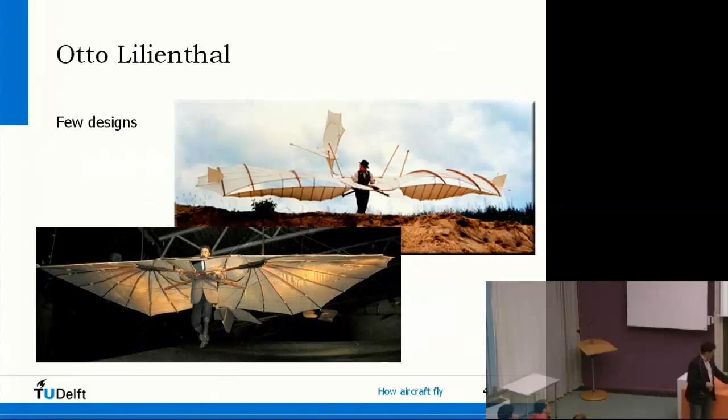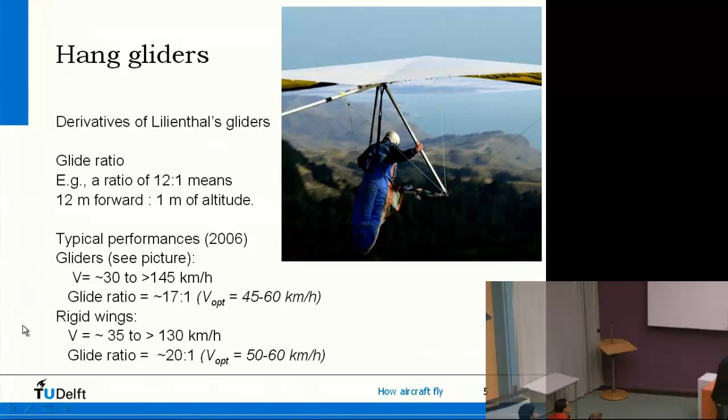What I said also for Mr. Lilienthal, he had his own hill and he was running downwards. Does it make sense in which direction you are running? Okay, so we are always trying to run against the wind - you are looking for airspeed. That's important, and you will see that later on also if you look, for instance, at aircraft flying around nowadays.

Here you see some numbers, but even today, aircraft taking off and landing always as much as possible against the wind. Ground speed is very interesting for the passengers because then they know how fast and how quick they arrive at their destination, but for the aircraft itself, for flying, of course the speed of air is most important.

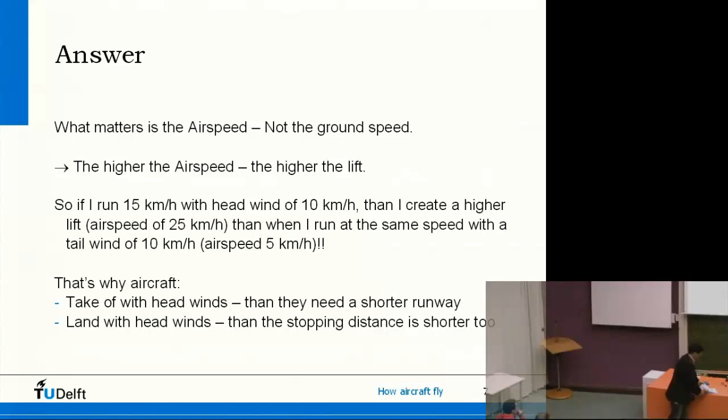Okay, let's see whether this works. This is a small film about a few old designs.

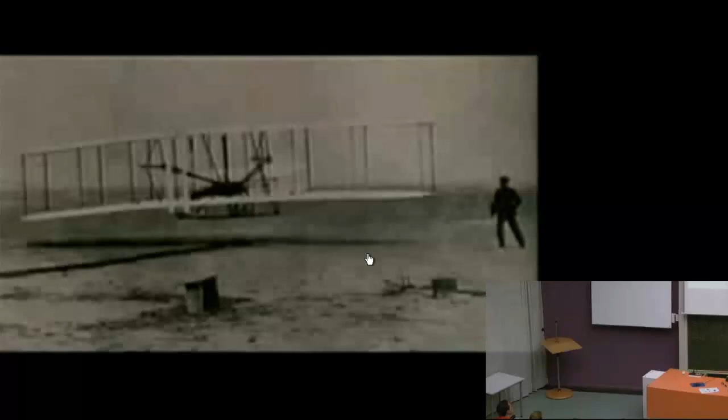Maybe it's... this is not understood, well, this is either. For some I can understand how you more or less think, but some of them are really, well, this is also something else.

Some kind of harvesting machine or something like that.

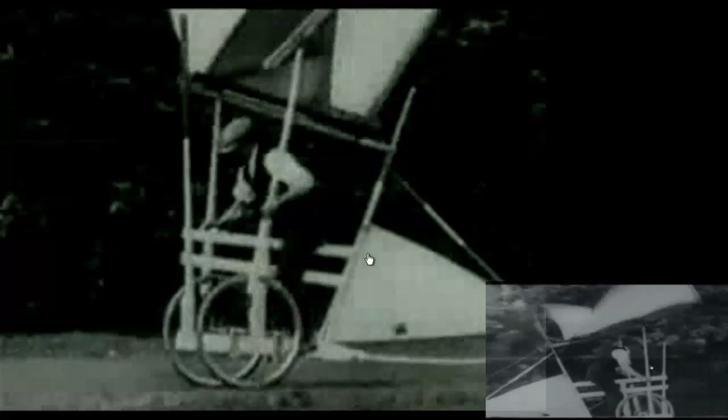He's lucky, he's lucky. He can swim.

This is something about rockets. Liquid propelling, well.

He has a little bit burnt ass. But he's trying again.

Well, this guy mounted a wing on top of his car until it fell off. Well, this is a picture of the first flight.

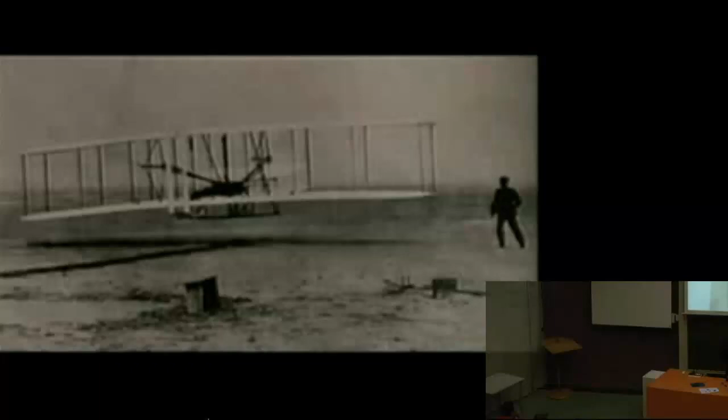No, not again, not again. No, not again. Please continue. Yeah, other way around. Thank you.

So, in the end, this was the historic moment, December 17, 1903.

We can also ask about this, but don't study it too intensively or for all the dates. There's a chapter, I think the first chapter in the book, about historical background, which I advise you to read. I remember in one of the exams I made 1 or 2 multiple choice questions on this, where you have 4 alternatives, usually 2 can be skipped easily, and with some understanding you select between the remaining 2. So there is indeed sometimes a question, but not an open question. I will not ask all kinds of stories. Usually it's in a multiple choice setting.

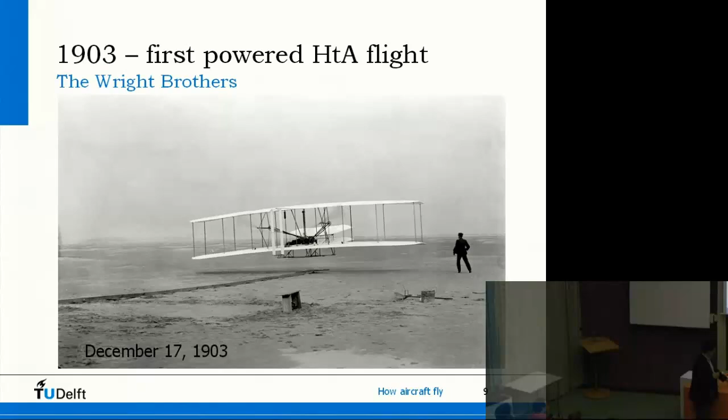Okay, this is the main event, and this is a small film I will show. This is from a couple of years later, and there you can see the Wright Flyer flying, and it's very nice. Maybe I will show it twice. First, have a look at it. A lot of discussions beforehand, the aircraft positioned.

And as you can see, it can fly rather smoothly. Of course, this is not the one from 1903, it is an updated, improved one, but nevertheless it looks much similar to the first one.

What you see, maybe I can tell beforehand, and then I will run it once more, is that the aircraft is put on rails. It does not have wheels, it's put on rails. There's also a tower with a counterweight which is pulling the aircraft, so you get sufficient speed in a very short time, so it has enough lift. He has some type of skis, but not wheels.

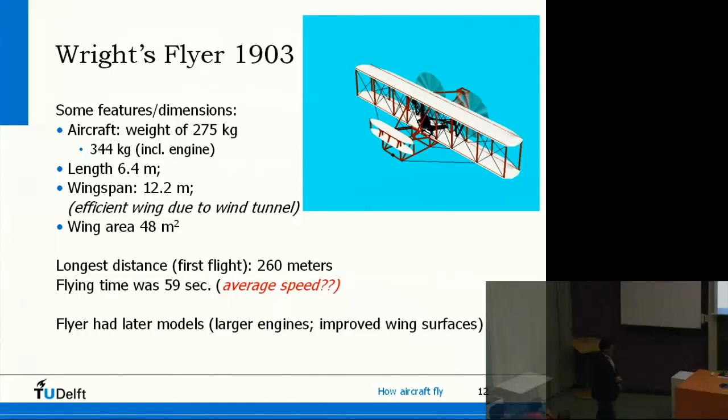Well, here, if you look into detail in a picture like that, you can see how flimsy such an aircraft is. You see a lot of wooden frames. There's some canvas or linen covering all these ribs. A lot of wires to stabilize the whole thing. And some of the wires are also used for steering, because they don't have ailerons as we have nowadays on our aircraft, but they pulled on wires. They just twisted the wingtips.

Just by sheer force. The flying direction is in this direction, so the elevators here in front of it are some kind of canard type designs. But it's very flimsy, very fragile looking, and indeed there were in many cases a lot of accidents with the first aircraft, because most of them were that type of manufacture.

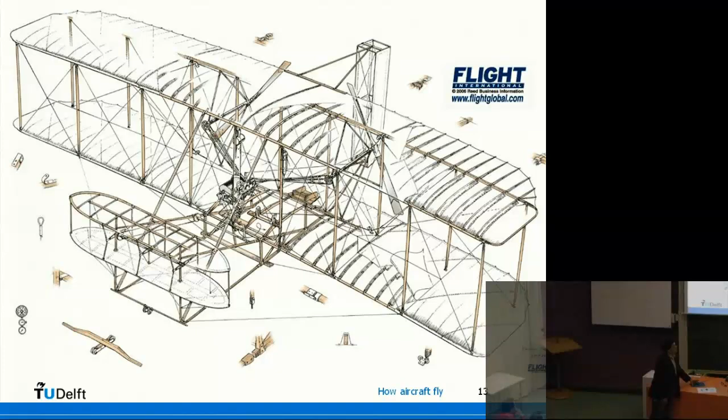Well, if you look at what the influence was of these first aircraft, the most important fact for why they were recognized as the first flyers was that they had a powered flight and a controlled flight, and it was a heavier than air flight. These three items are very important. Of course, you have seen with ballooning that before that there were also other flights, but in many cases with balloons or lighter than air vehicles.

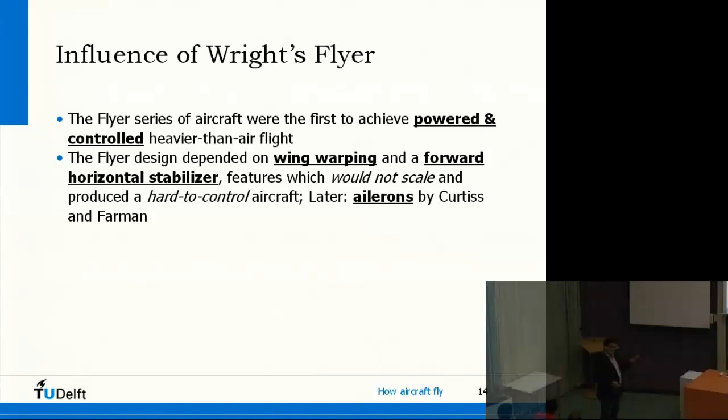Also, Lilienthal was flying around with heavier than air kites, but it was not powered. Definitely he had some control of it, but not powered. So that's the difference from the other ones. As I said, the twisting, the flying, sometimes they did by twisting parts of the wing. That's called wing warping. Yeah, just by rolling, they did it by some wing warping. Later on, Mr. Curtiss and Farman, a few years later, developed the ailerons, movable small surfaces attached to the wing, and that helped to steer much better.

And of course, they also did some contribution in wind tunneling. You need some wind tunnels to test before you go to fly. And it was also rather new in these days.

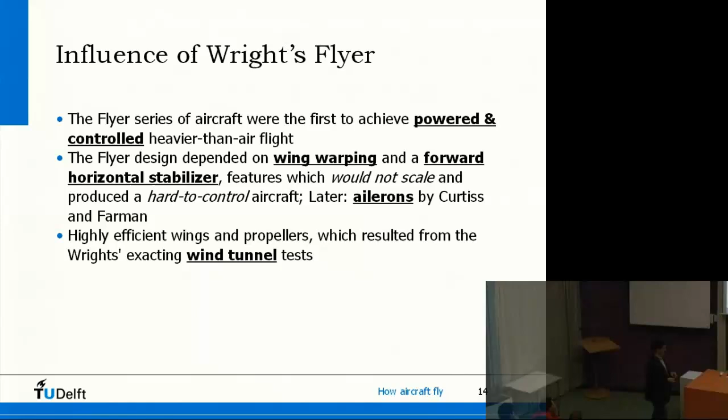Do you think it's going to be like mono wings soon? The question is whether I think there will be mono wings soon. It's hard to tell. Blended wing concepts, where you have no fuselage anymore, but the wing is thick enough that people can sit inside the wing.

Technically, I think it is possible, there's no doubt about that. You see also the B-2 flying bomber. But there are a few obstacles I think they still have to overcome. First of all, interesting the public for it.

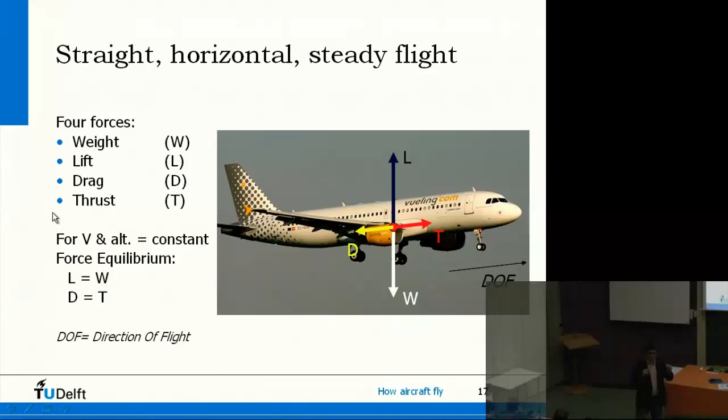If we look at the lift, the main portion, the majority of the lift is created by the wing. Small contributions also come from the tail surfaces, but 90-95% comes from the wing itself. The weight, most of the weight is concentrated in the fuselage. In the fuselage you have your main structure, but also all your payloads, cargo, passengers and so on. So about 50-60%, sometimes even more, of your weight is concentrated in the fuselage. The drag is induced by the fuselage, which has a significant front area, but also the wings, tail surfaces, and so on. And of course, the thrust is provided by your engines.

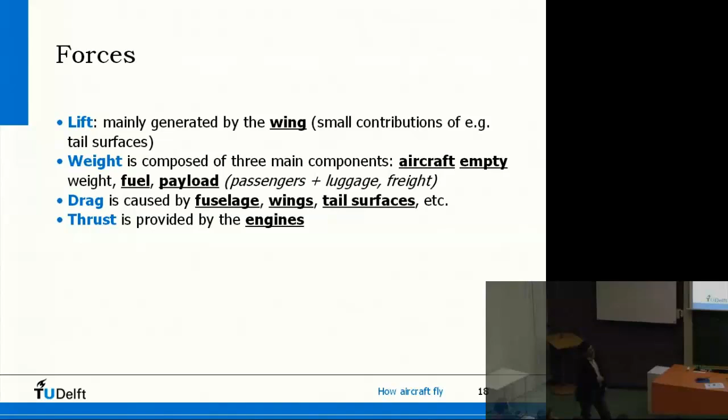One of the main rules in aerospace engineering is you always need to look for a lightweight aircraft. Why?

Yeah, if the aircraft is lighter, you don't need as wide wings, and if you have shorter wings, the drag is smaller as well. And that makes it lighter as well.

Yeah, but that's an optimization, and once you have that, let's first look at other answers.

Most efficient way to fly: well, less weight means less lift needed, so you need less thrust, which is cheaper. Less weight, less lift, less drag, less thrust, and so on.

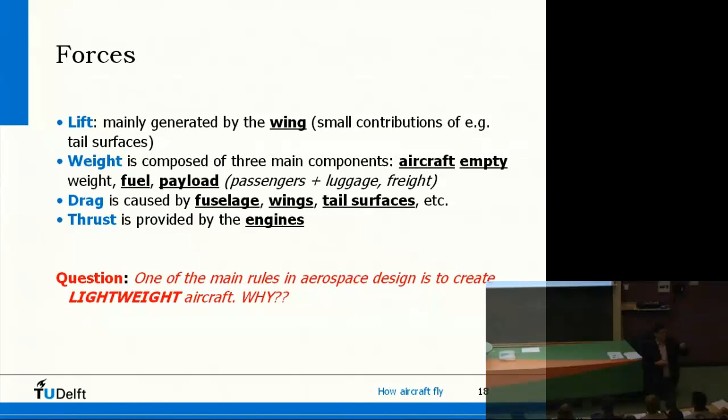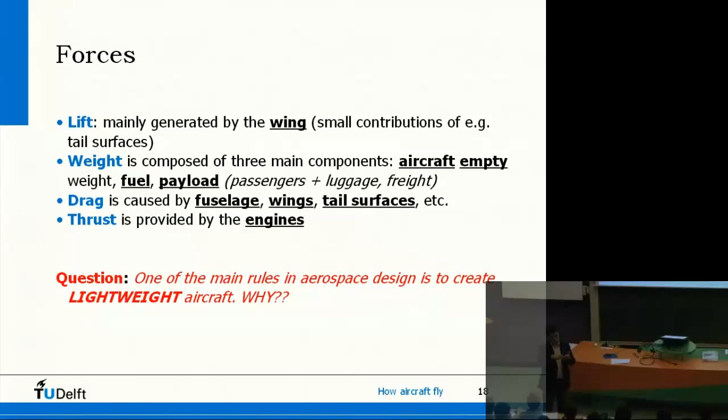Okay, actually there are two answers here. First is indeed the loop in which you have less weight, less lift, less drag, less thrust. And if you have less lift, you can have a smaller wing. If you have less thrust, you can have a smaller engine. That means again a decrease in your weight and so on. That's the so-called snowball effect. At the end of this course, I will come back to that.

The other answer is that the weight of your aircraft actually consists of three parts. Maybe I can start to put forward this answer, and that was the answer I was actually looking for in this case: three main components, the empty weight, that's the structure, all the systems, etc., the fuel, and the payload.

If I decrease structural weight by designing and building lighter aircraft with better materials, for the same takeoff weight we can increase payload or fuel, or a combination of both. More payload means more revenue, and more fuel means we can fly longer distances. That's why there's a continuous incentive to develop lighter structures, moving from metals to composites or combinations of metals and composites. It's all about improving materials, improving structures, and improving performance overall.

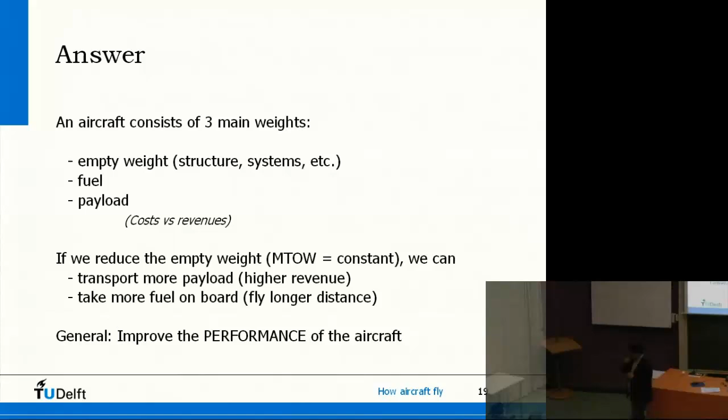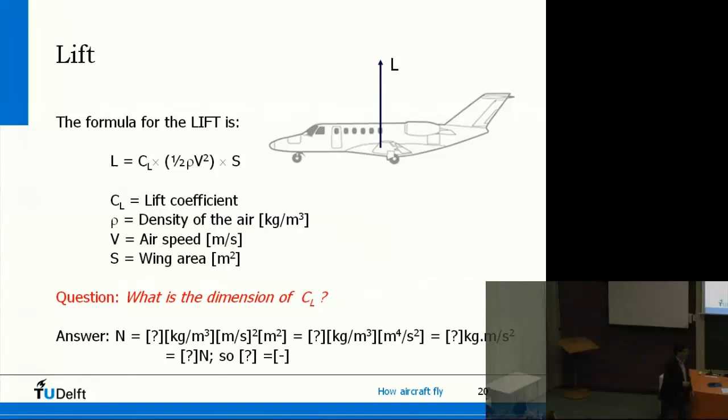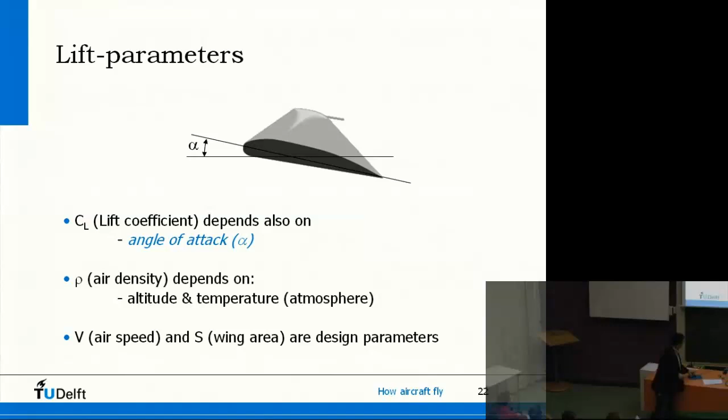You have seen the shape profile, the profile with a camber. Those are rather complicated in many cases, also not that easy to fabricate. But we often make them, and we don't use symmetrical ones. Why don't we use symmetrical ones? We also can generate lift by our angle of attack.

The pressure difference you are creating - yeah, but that's also possible. You also can generate it by a certain angle of attack. So that's not it.

To store fuel, you get more space, maybe - to minimize drag. That's the best answer and the right answer.

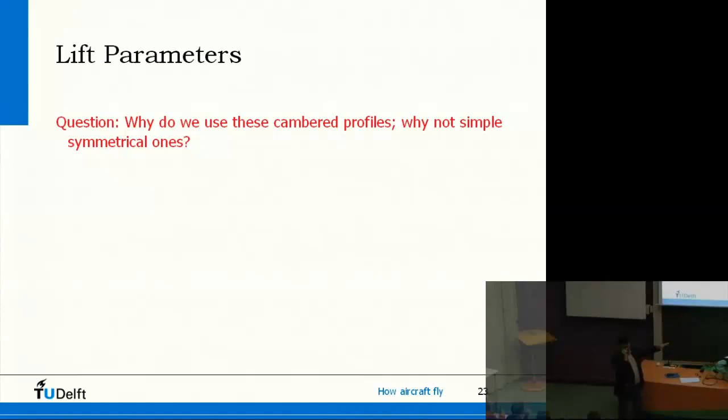Because as soon as I pitch up my wing to generate lift, I also get much more drag. And that's the reason why we often work with these shaped profiles. So in particular for horizontal cruise, we try to have a shape of the wing which minimizes drag. Of course, we have to climb first, and later we have to descend, but the most important thing in flying is still, on long distances, the cruise flight.

Well, in the past, early ages, there were a very large number of different systems to describe these airfoils.

What's the time? Well, I'm already in the break. I will finish this and then send you to break.

A lot of different names - everyone more or less generated his own concept. You have here the Wright designations, you have the RAF designations. Later on, from the 1920s I think it was, there was an organization in the United States who more or less classified profiles, and from that time on you saw a lot of so-called NACA profiles, and those have specific descriptions.

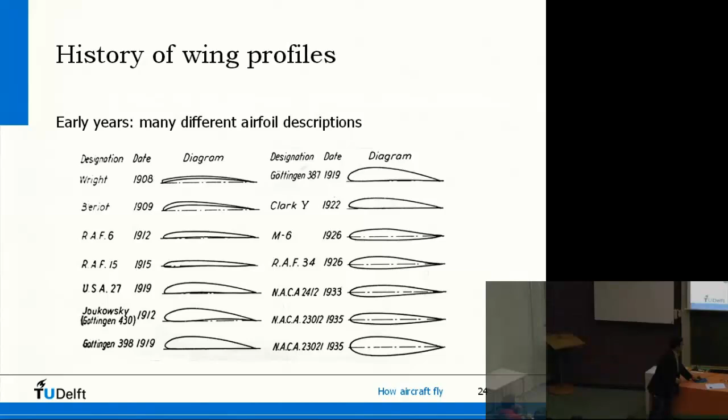These NACA profiles gave a very distinct description of how a profile looked like. Well, here you see some information - that was the National Advisory Committee for Aeronautics, established in 1915. And they were not only looking at profiles, they were also looking at propellers, landing gears, aerodynamics, and so on.

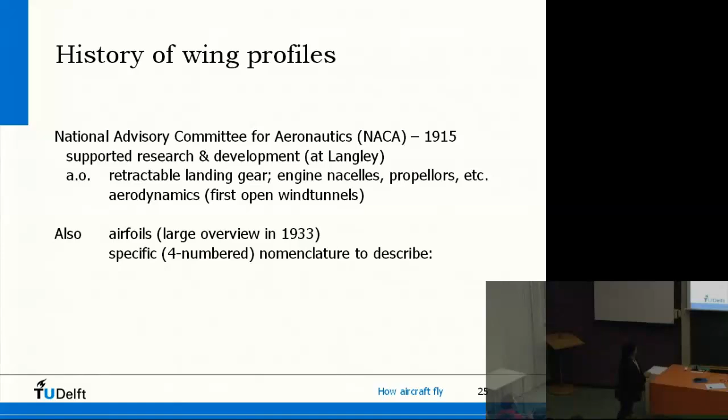So they generated these airfoils, and those are 4-numbered digit nomenclatures. And here you see, for instance, one: a NACA 2412 means you have 2% camber, that means a distance of 2% of the chord length. Everything is related to the chord length.

2% at a distance of 0.4 times the chord from the nose - so this is 0.4 times the chord length. And the thickness is 12%, again, of the chord value. Well, this is a system you see is still used quite a lot. Of course, nowadays you also have other systems, but this is a very transparent and very nice way of describing these profiles.

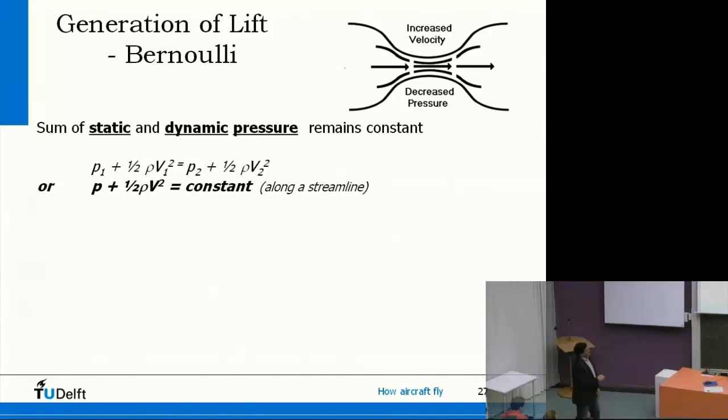What he said is that you have a static pressure and a dynamic pressure. This is the static pressure and this is the dynamic pressure. If I determine them at two locations, let's say position 1 and position 2, these are identical - they are constant. So this equation is constant.

And what you can see right now is, if for instance the speed is increasing, then you can also see that the local pressure is decreasing. So a higher speed means a lower static pressure.

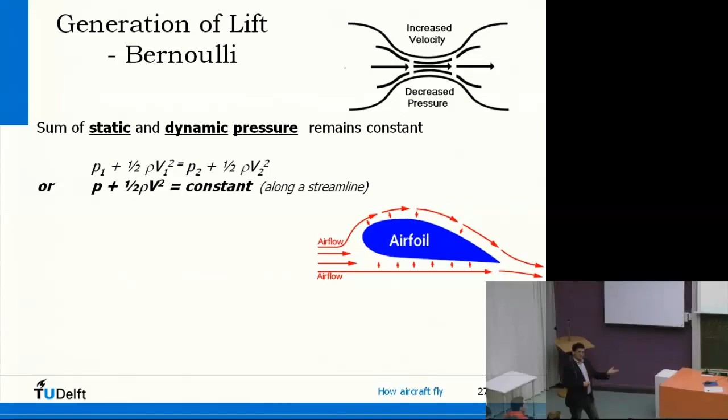So if I have an airfoil, with low airspeed below the airfoil and high airspeed over the airfoil, I will have higher pressure here and lower pressure up there. So a high relative pressure at the lower side of my airfoil and a low pressure at the top, so I generate a pressure upwards. Upwards pressure that's causing my lift. That's for incompressible airflows.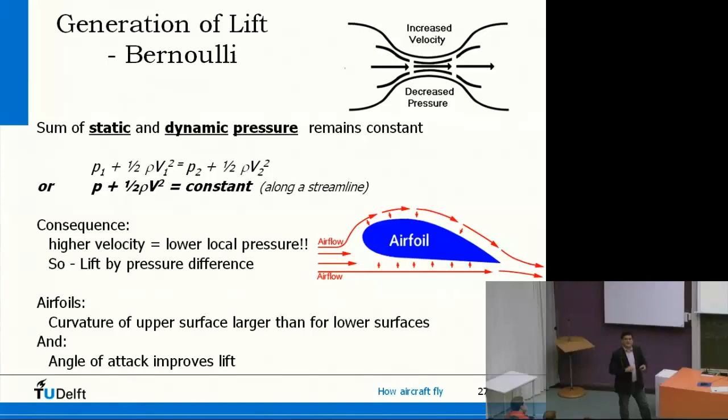And also, I will show in a few moments, the angle of attack also has a big influence on that pressure difference.

Well, you can also use the Bernoulli law to think about how to measure airspeed. I will not ask you to do that right now, I just try to explain it.

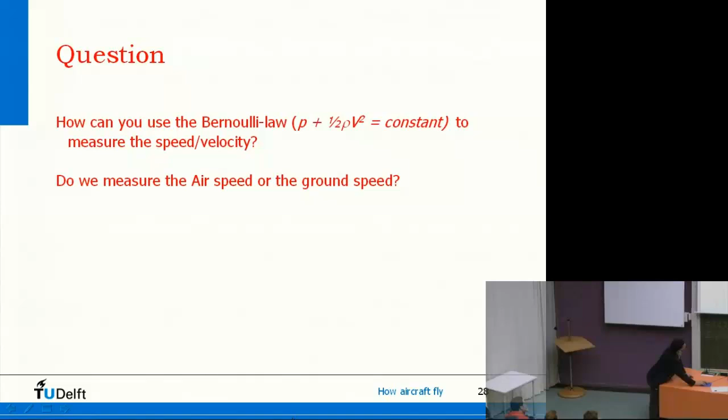If we have a pitot tube - that's actually what it is - the air is coming from this direction, goes into this tube and comes to a standstill. So what I measure here at this location is the total pressure, the absolute total pressure.

Total pressure. On the other hand, the airflow is also passing by with some speed, so the local static pressure, not the absolute one, is measured here, at this side of my measuring device. That pressure difference - total pressure minus local pressure - gives me the airspeed, because I can use the Bernoulli equation again, in the case that at this end the velocity is 0, so it has no contribution. And by rearranging this, I can calculate my airspeed.

That's, for instance, the principle you can do with your pitot static tube. Again, realize you are measuring the airspeed, not the ground speed.

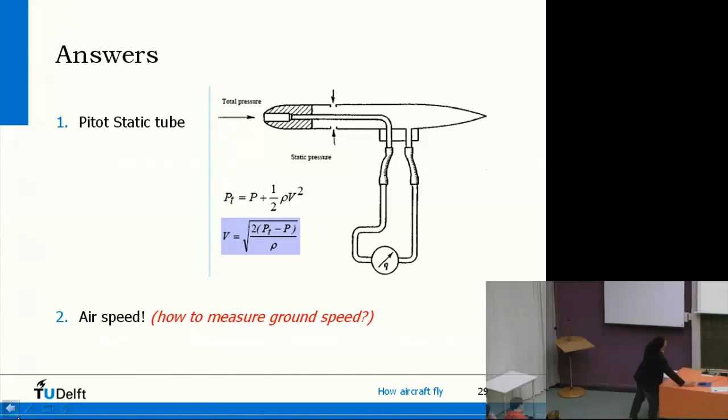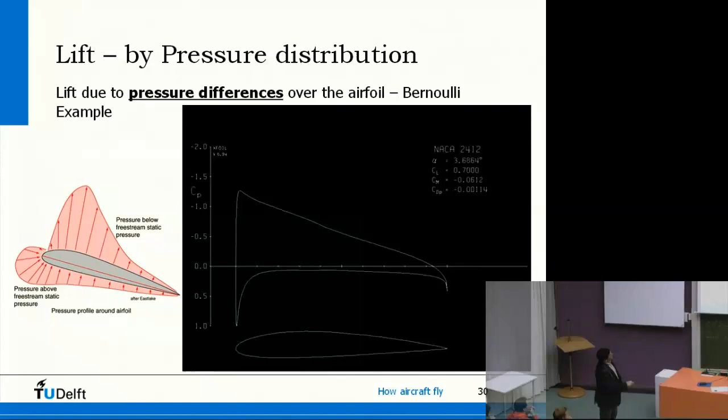You can also plot that, as you can see here. You can see the curve of the lower side, and here the curve of the upper side. And the area in between is a measure for the total lift of that profile. You can integrate it, and then you can calculate lift.

And now I have to go here and try to get this one, because this is a very nice link, also for you to look at it at home. I hope it's a little bit quick, yeah?

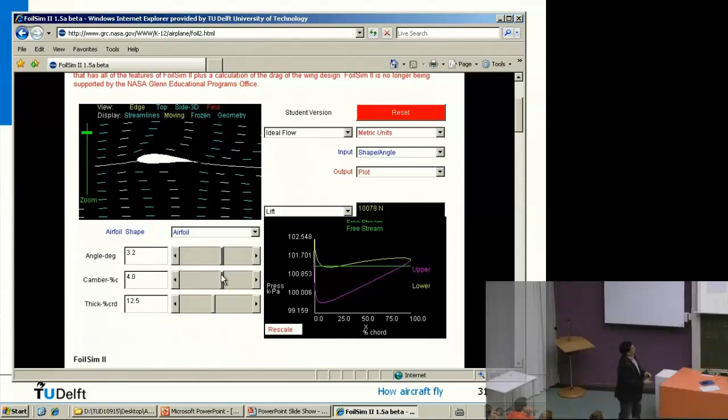There are more items to it. You can also flight test. With a specific profile you've chosen before, you can play around with the speed, the altitude, and so on. So this is typically a tool you can play with to see the effect of camber, angle of attack, and so on.

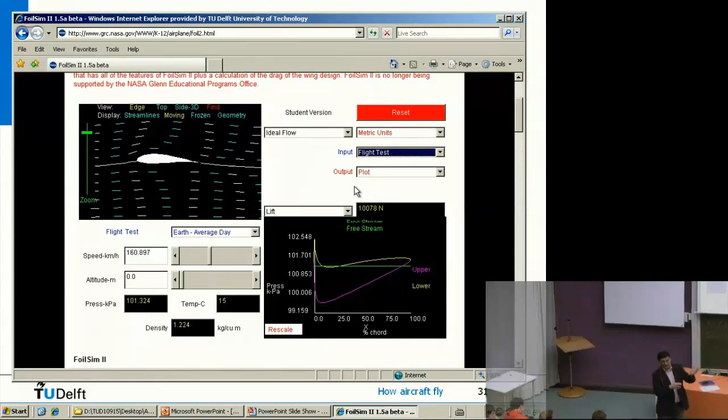Yeah? So there is the link, and you can see it later on in the slides. Probably we'll also use this simulator during one of the studio classroom sessions you will have. Yeah? Okay.

Sometimes I made these slides with a lot of clicks, but it's not always that useful. Okay, again here you see the profile with all these features we've seen before.

NACA description. If I take two, for instance this one and that one, you see here two curves. Which is which? Any idea? The red one is 0012. And why?

This is a symmetric one. It has no camber, only a thickness of 12%. That means it is a symmetrical profile, and at zero angle of attack you also have zero lift, a zero CL value. So that means you go through the origin of this plot. So indeed, the red one is this one, the other one is that one.

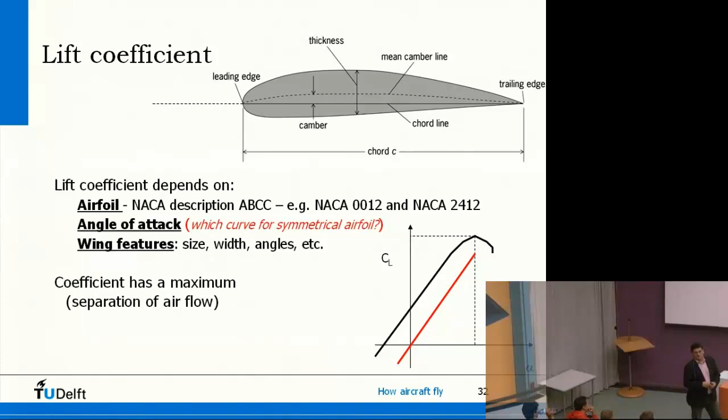Here you see typical CL-alpha curves, and in many cases they have a large part which is linear. At some point, when you increase the angle of attack, you'll see a leveling off, and in the end you get stall.

Do we need to know how the NACA notation works for midterms, or be able to use it? No, I think at least it's for your common knowledge that it's very interesting to know how it's built, so if you work with it a few times, it becomes easy to recognize what kind of shape it is. But it's not something where I give you a number and you panic. These are still numbers you can look up in your books, and understanding is much more important to me than knowledge of all these small details.

But here you see, for instance, a full plot of the CL-alpha curve, and there you see that after a while you get maximum lift and then you get stall.

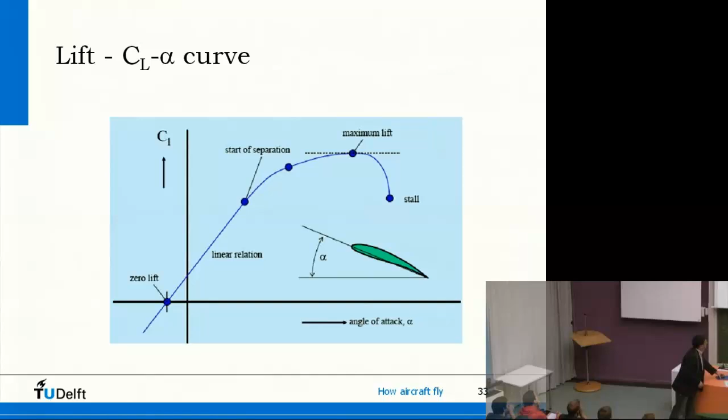Here you see in several steps what happens. This is a very nice airflow, as you can see here. When you increase, in this case, the angle of attack, the flow becomes more and more problematic, and in the end you get delamination, disconnecting of the flow from the airfoil, and then we're talking about stall. Then you lose your lift, and that's very dangerous.

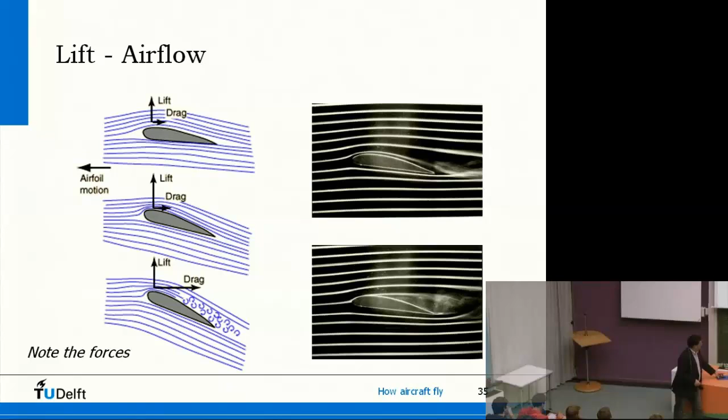And here you see there's no contact anymore between the flow and your profile. Well, I will skip that one.

We have seen that if you would like to fly at low airspeeds, you have a problem. Lift is proportional to density and to wing surface, and both are more or less fixed for certain conditions. We cannot change the wing surface much, and we cannot change the density much, because when we are landing we are at sea level, where density is about 1.22 or 1.25.

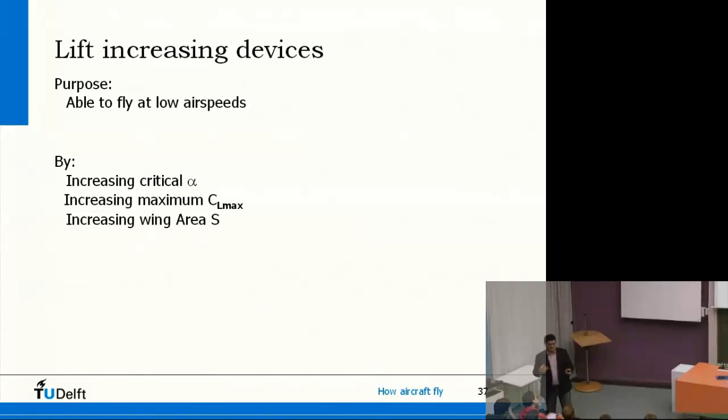But we would like to drop our velocity, our speed, significantly. So we actually have very limited possibilities to play around with. The only thing we can do is play around with additional devices: slats and flaps.

So why not always fly with flaps? Because at high speed you get more and more drag. It's always a balance - you need enough lift, but also as low drag as possible. At landing and takeoff the speeds are not that high, so drag is not that high, but we focus more on lift. At cruising altitude, drag is more dominant.

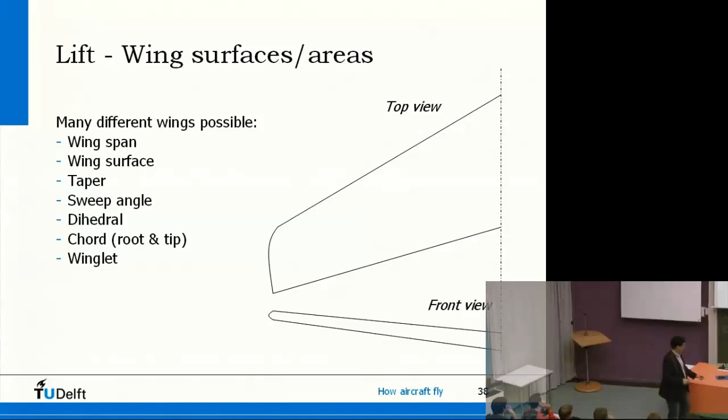You can play around a lot with wings and wing surfaces. This, for instance, is a top view - this is the wing surface, the wingspan is from tip to tip. The taper means how the chord decreases from root to tip, and so on. You have a lot of variables to play with when designing wings. You can also see here tremendous amounts of different wing shapes.

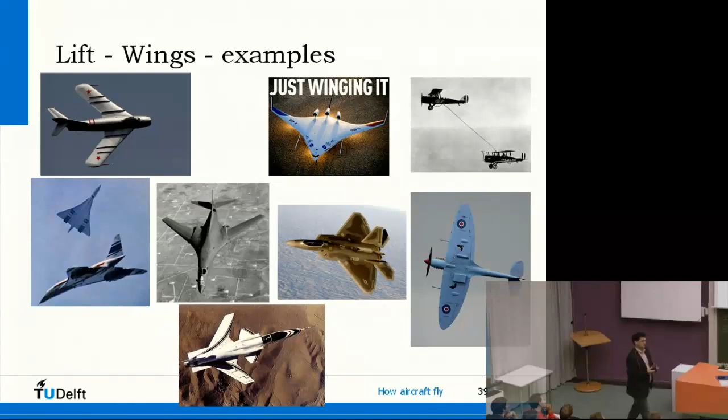So far, something about lift. Questions about this item? Okay, then a few words about drag.

If we look at drag, there are a number of components. First of all, you have skin friction - this is like if I rub over this surface, you have skin friction. The air does too, and you get skin friction.

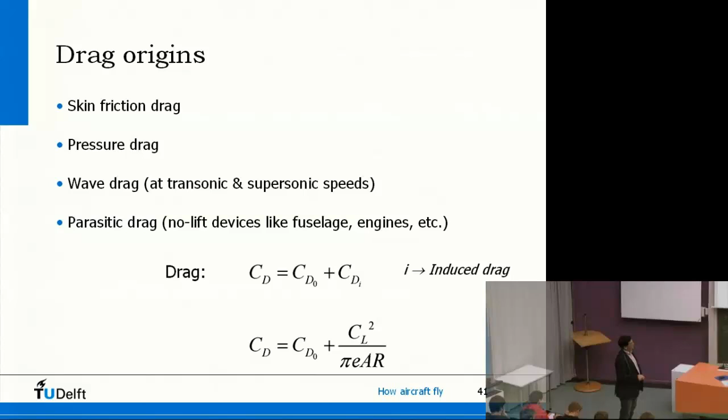What we often do is define the drag coefficient as a zero value, a constant, plus one component proportional to the square of the lift coefficient. You see here some parameters like tapering and other values - these are constant, but this part changes with alpha. I will come back to that in a few moments.

Just to illustrate a bit some different types of drag related to shape and skin friction: you can imagine this shape has almost no drag due to its form - it's very flat, perfectly aligned with the stream, but has a lot of skin drag, so almost 100% of its drag is skin drag. This is the opposite - if I put a plate perpendicular to the airflow, almost all the drag is directly related to its position, to the form in this case. Here you see some intermediate shapes.

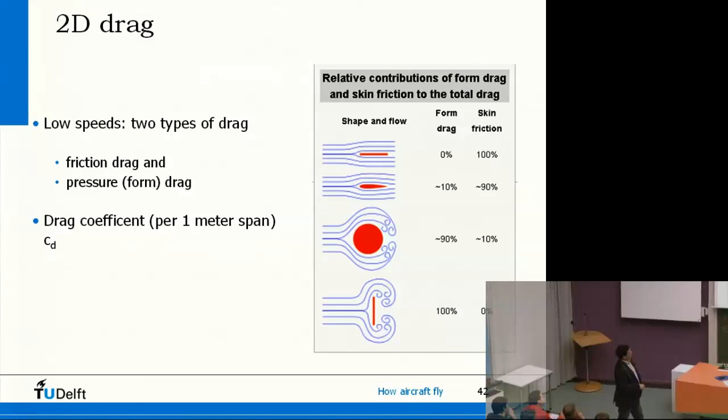What we discussed so far is more or less two-dimensional in the plane. If you look one step further, you can also see three-dimensional effects, which also cause some drag.

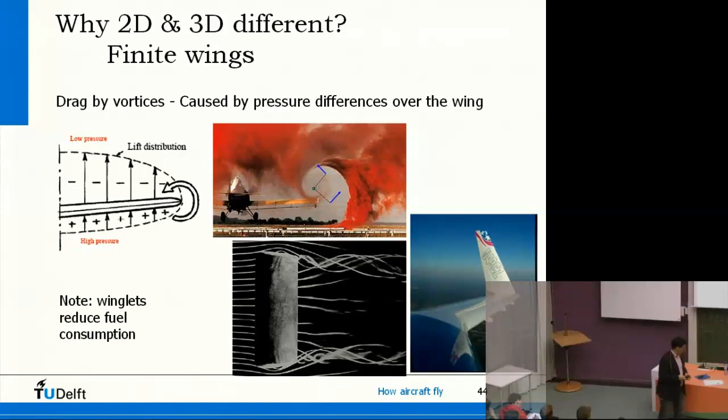Here you see two lines on the left-hand side in one plot. This is what we have seen already, the CL-alpha curve, the lift coefficient CL versus the angle of attack. In the same plot you also see the drag coefficient as a function of the angle of attack. Realize it looks as if they are more or less the same size, but there's a significant scale difference between these two. The scale here is 5 times smaller than here. I put them in one plot because otherwise you would only see a very meager curve, a very meager line. Now you see them more or less like that.

I can also put them in a so-called lift-drag polar. What I do is for each angle of attack, take the two values and put them in a plot like this. So at each angle of attack I have one drag coefficient and one lift coefficient, and I get all these data points. When I have this line making contact with my curve here, then I have the best ratio CD over CL, the lowest value. That means that's the value with the best flying conditions. Usually the maximum CL/CD ratio is found here, and we try to design, for instance, the cruise flight as close as possible to that value. Then you have a good and efficient way of flying.

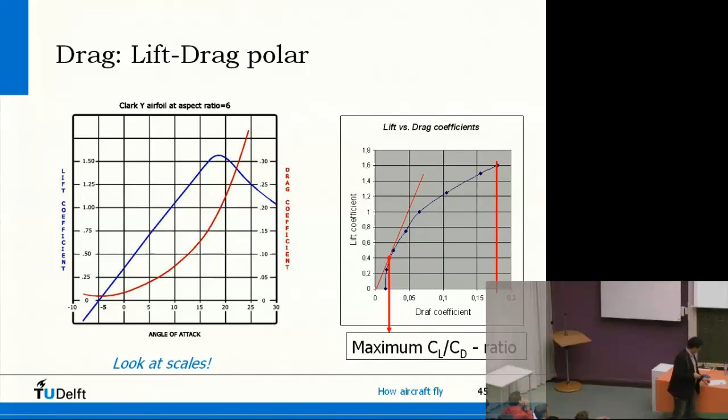I will skip that one. Just to show that the CL/CD ratio can be very different for different types of aircraft. You see here a modern sailplane, the Lockheed U2, that's this one. This is a bird, an albatross. Boeing 747, Concorde, as you can see here. A Cessna, again the Concorde, a Sparrow, and the Space Shuttle. You see already the Space Shuttle is not that efficient in flying, but it's not designed to be, it's just to have some wings to come down. But here you see some typical values. This aircraft is even exceeding an albatross, which is already recognized as a very good, efficient flying bird, but such an aircraft is even exceeding it. Modern sailplanes can even have much higher values. That's an art in itself, more or less.

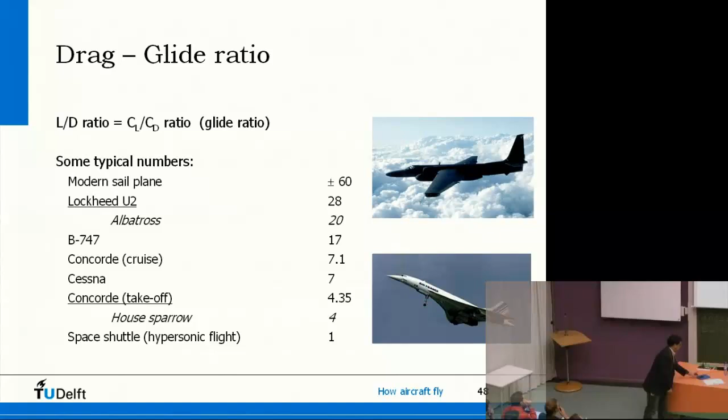I will have a few more words about the two other forces. We have seen 4 forces: the lift, the drag, the thrust, and the weight. We have seen now the drag, and that has to be counterbalanced with the thrust. For flying, we have a number of engines we can use: propeller engines, piston engines, turbojet, turboprop, turbofan, ramjet. Nowadays, the Americans are doing a lot of research in this area, the ramjet and scramjet, where sometimes experiments fail and some are successful, but there's a big research ongoing on that one. Most aircraft nowadays are equipped with turbofan engines, and you see a picture of that here.

If you are talking about a turbojet, that's only the core without the fan, so all the air is flowing through the hot parts of your engine. In this area the air comes in, we compress it even further to high pressures, and here we mix it with the fuel and then ignite it.

In a car you have a piston engine with a non-constant burning process. You have some explosion, then a work cycle, then compression, igniting, explosion, work, and so on. That's intermittent. In these air engines, it is a continuous process.

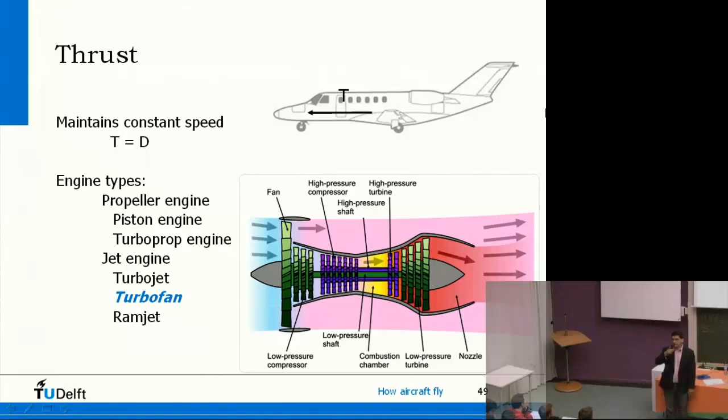You hear also the answer from your colleague. He knows more than I on this area. Okay.

This is also a question I would like to give as homework, you can see the question and the answer, think about that. One comment about weight, and then I give the floor to Professor Hoekstra, because he's already waiting there.

The weight we have seen already is divided into 3 main components: aircraft empty weight, and there you can see what kind of components are in there. What's always a little weird and funny is that if we talk about aircraft empty weight, we also include the crew and the flight attendants.

The rest is payload, and the other one is fuel. So if we minimize the weight, we can increase the payload and we can increase the fuel. Increasing the payload means more money. Increasing the fuel means longer distances.

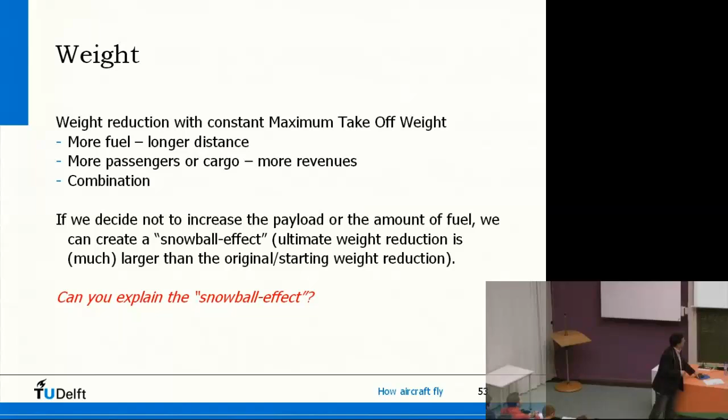Another way to use it, well here you see some numbers. Another way to use it is for instance the so-called snowball effect. We also discussed it before, that once you decrease the weight of particular sections, let's say you replace a part of the structure with a new structure which has lower weight, you can use this snowball effect.

Because lower weight means you need lower lift, you have lower drag, you can have lower thrust, and lower lift means a smaller wing, smaller engine, and again. So you enter more or less in a loop like this. With an initial weight reduction of maybe 1,000 kilos, you could end up with an end weight reduction of maybe 2,000 kilos or even more, due to that snowball effect.

I think I stop here and give the floor to Professor Hoekstra for answering and looking at these questions we have seen before, from 3.8 and 3.11.

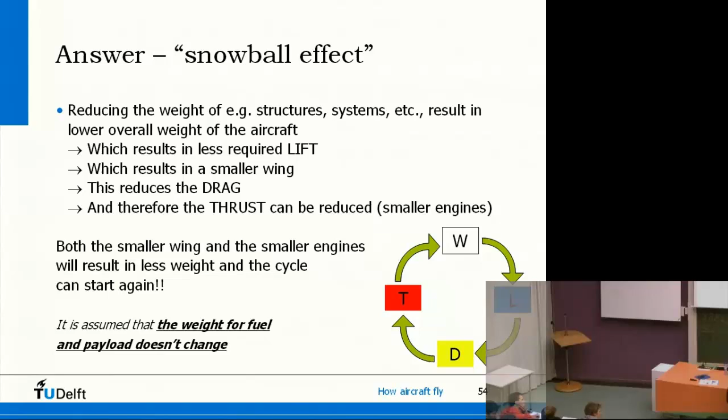Okay, I got a lot of questions on those two problems. One of them was not in the solutions that we put on Blackboard, so I could have anticipated that. First of all, as you might have seen, the solutions for chapter 2 and 3 are actually based on the 4th edition. That's why some of the problems were missing.

And it's also quite US-centric, they used a lot of US units. So I'll also go into how you can easily work between those two units, because I heard some people had trouble with that as well, if I have the time, otherwise I'll do it next lecture. But I'll look at the problems first.

Who did make the homework? Okay, those are the ones that usually pass the exam. Really true, because it all looks very simple. If you just look at the answers or the derivation, then it seems obvious. But if you have to choose yourself what to do, it's much harder.

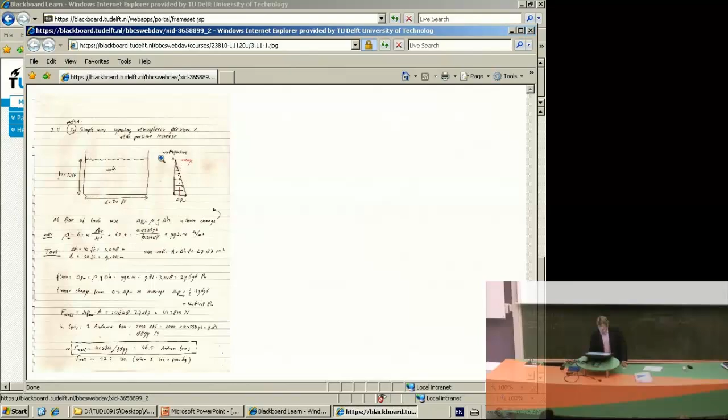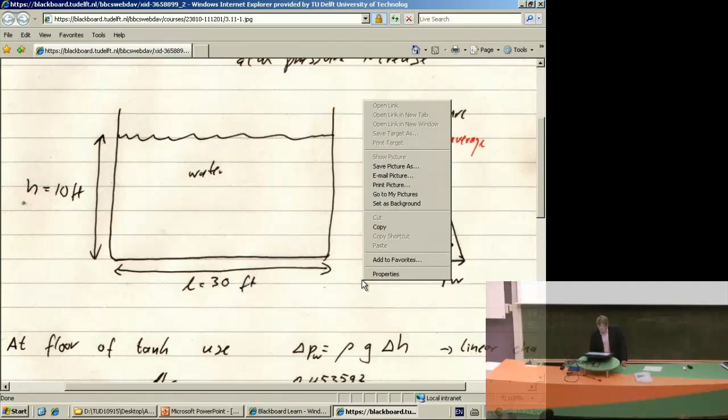Okay, so we have a water tank. Don't know how well this works, but we'll try. What kind of program is this? Okay, still Internet Explorer. Maybe it works better on the screen.

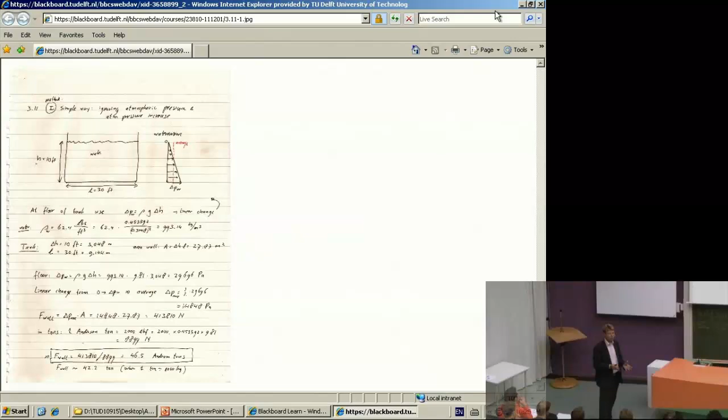But anyway, the water tank, there were it was basically, you use different things there. You use the hydrostatic equation to calculate the increase of water pressure in a tank. An important property of a fluid compared to a gas is that a fluid does not compress or hardly compress with increased pressure. While a gas, where the molecules are much further apart, that will compress much more. So when you use the hydrostatic equation, you do not need to worry about the changing density when you go deeper.

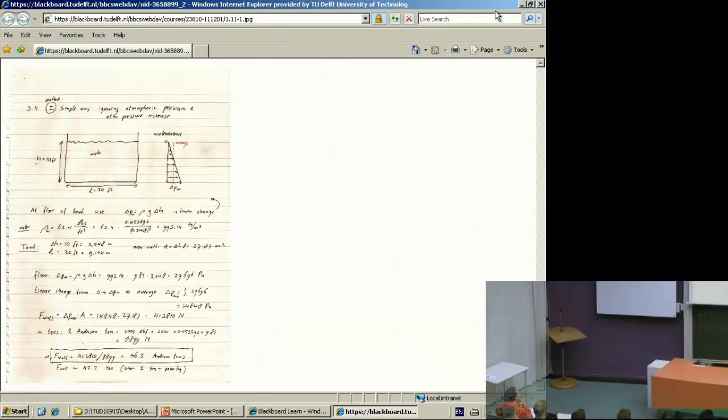So then it becomes very simple. You can just use the simple formula with the deltas. Delta P, can you read this in the back as well? A bit hard. But if I click once, it's zoomed. The right one I can... No, but this is not in...

There, oh, okay, sorry. So here we could say to 150, oh, that's too much. 75. This better? Okay. So,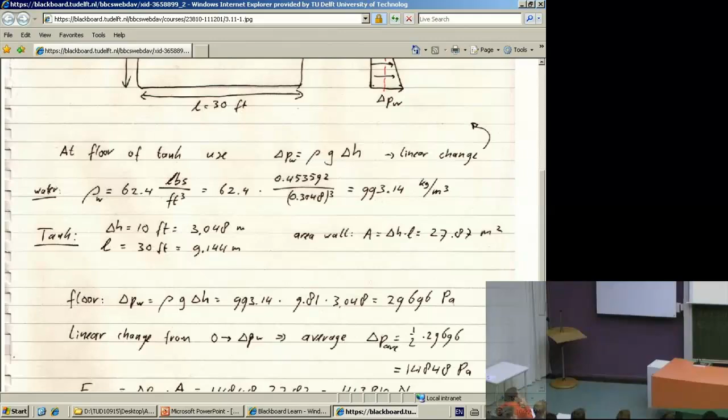Here we see, let's use the figure a bit still. Here you see we can simply use the hydrostatic equation, which shows that with increasing depth there's a linear relation to the increasing pressure. So what basically happens is you go to an increased delta PW, due to the water, at the floor of the tank, which we can calculate by filling in the depth of the tank. But if we want to know the total force on the wall, we have to take the average of that, which is half. So we first calculate this value and then use half of it to calculate the pressure.

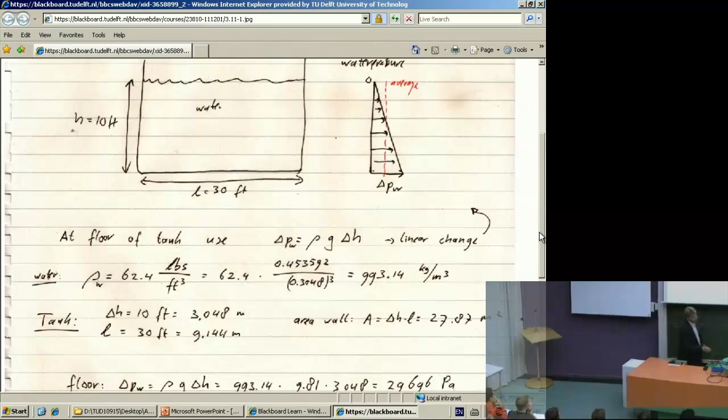And then, I cannot go down with this one. Of course, we first always move to SI units, so meters and kilograms per meter cubed for the density. The area of the wall, we calculate that in squared meters as well. And then at the floor of the tank, we can calculate the pressure, and it becomes a very simple exercise basically.

Because for the average, here this is the pressure at the floor of the tank, we use half for the average, and this half we multiply times the area of the wall of the tank, and then we get this, which is in Newton. Well, this is the pressure times area, Newton. And then we convert back to the tons that Anderson uses.

I've called them the Anderson ton here, which is 2,000 pounds instead of the 1,000 kilograms that we normally use. So if we convert that to newtons, this is a pound, in English pound, times G, you get it in force, the lbf, times 2,000 is this. So this is 1 Anderson ton. So to express this in Anderson tons, we have to divide this answer by this, and we get 46.5.

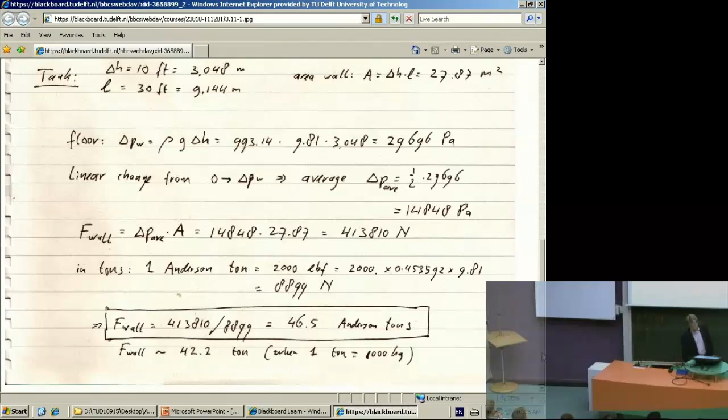But this is a simplification, of course, because we've been talking about the increase in atmospheric pressure when you go down and the decrease when you go up, and we have completely ignored that here. So in the exercise, he basically asks for the force of the water on the wall. And if you were correct, you would add the atmospheric pressure here, because here the atmospheric pressure presses on the water. So if we only look at the force of this side of the wall, you would have to add the atmospheric pressure. It doesn't start at 0, there's no vacuum here, but it starts with sort of P0.

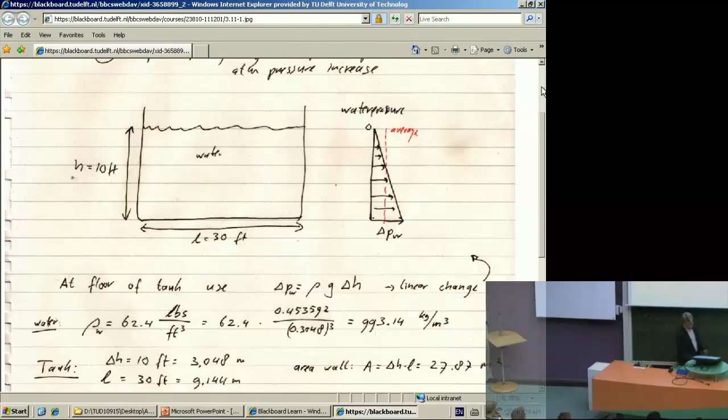But then, of course, you get a huge force, which cannot be what he means and is also not useful. But you could also look at the net force, the net effect, and then also take into account the increase in atmospheric pressure.

Well, what did I use? Zoom once, and then we change it to 75. That was it, right?

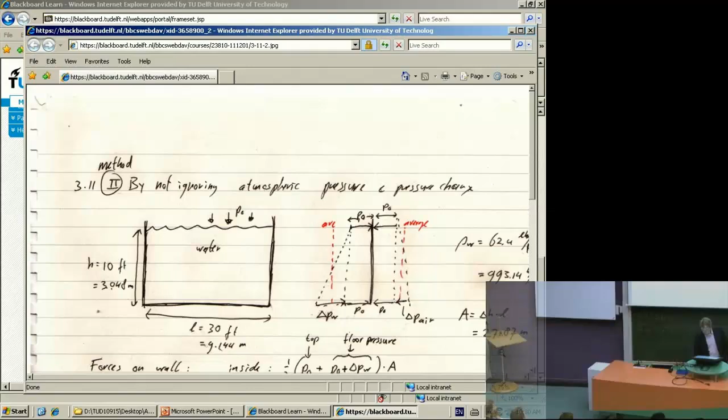So, if you do, the real situation is more like this. You've got the pressure of the water on one side, you add the atmospheric pressure, not do it in the right scale, but anyway. Here the same on the other side, but you also get an increase of the air pressure when you go down. Well, we do not need the complex standard atmosphere equations for a height difference of only 3 meters. There we can use the simple hydrostatic equation as well.

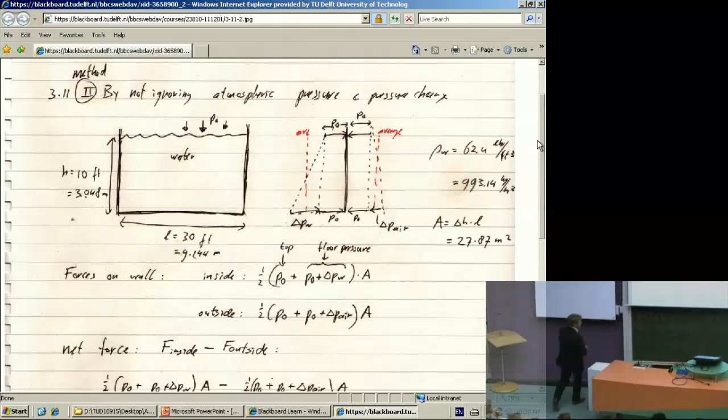So if you calculate the sum here, you add this all up, and of course those two compensate again. The only effect is that you get a reduction of water pressure due to the increase of air pressure. Well, what is the net effect?

He doesn't state at which altitude you are, so apparently Anderson didn't mean for you to even use the atmospheric pressure. But if you do, and we use the standard density of the air at sea level according to the standard atmosphere, you get 46.4. So it's in the order of 2 promille, 0.2% change.

So you see that the effect is indeed minimal, because water is 1,000 times as heavy as air. Is this clear? Probably you tried ways that were much harder, and in the end it's not that hard. You can simply use the hydrostatic law, and you have to take care of the average.

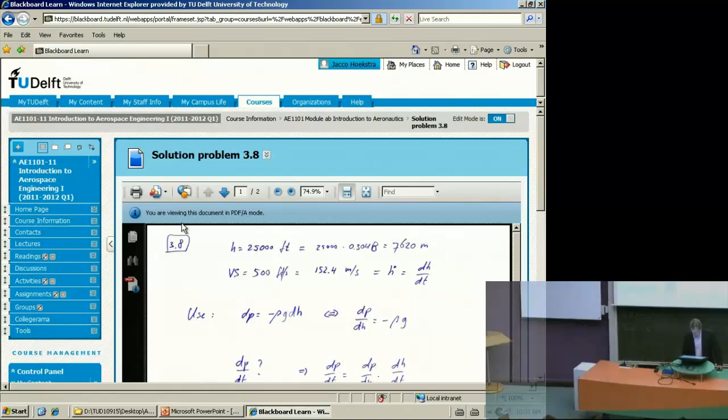3.8, shall we have a quick look at that one as well? That's a PDF, that should work better. Rather have it in full screen, but okay. Can we go to full screen here? No? Let's go to a separate window then. Get it, save a copy. Okay, well, let's just do it like this.

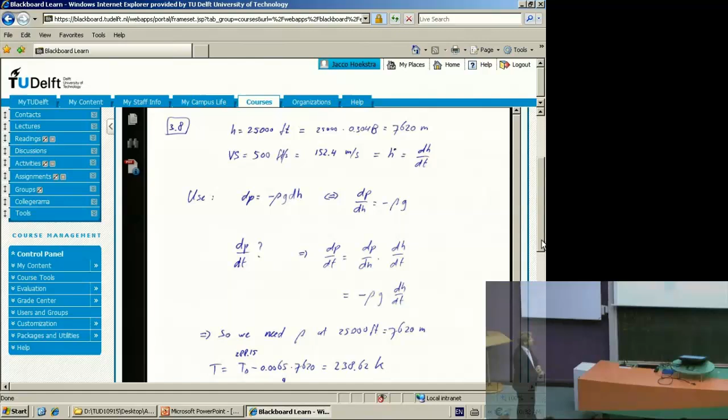So the question here was the change of air pressure per time. And what he gave as answer were two things: the altitude, 25,000 feet, and the vertical speed of 500 feet per second.

So if you calculate those, you first convert to SI units. 25,000 feet, we're well within the first layer. That's always lucky, so we only need to go through one atmospheric calculation. We're under the 11 kilometers.

The vertical speed, 500 feet per second, we convert to meters per second by multiplying the feet with 0.3048. So 1 feet is 0.3048, so we multiply this number by the feet to get the meters.

If we then use the hydrostatic equation as we use it in the atmosphere, you can see that if we change this, the dP/dH, the change of pressure per altitude, is minus the air density times the gravity acceleration. But we needed dP/dt.

The nice thing is that if we want dP/dt, we just multiply dP/dH times dH/dt. This is the change of altitude, the change of pressure per altitude, these two disappear, so that's exactly the same. This one we know, density times gravity. This is the vertical speed. So it's basically a multiplication of the vertical speed and this.

Well, then we have to watch the units again, and we of course have to calculate the density. Or take it from a table, but that's no fun, so let's calculate it. Also, with all these different atmospheres, it's always better to calculate it yourself.

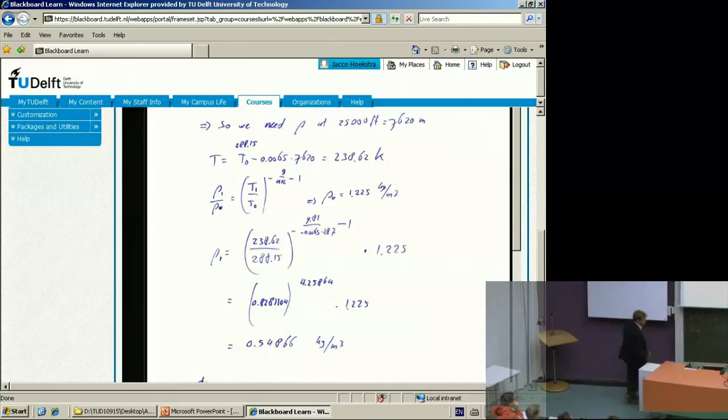Here we first calculate the temperature, then we use the atmospheric formula for the troposphere. We fill it in, we get the air density, 0.54, already going down halfway, that seems reasonable. And then we just multiply the two to get the real answer: we take the density, the G, the vertical speed, and we get a change of minus 820.3 Pascal per second.

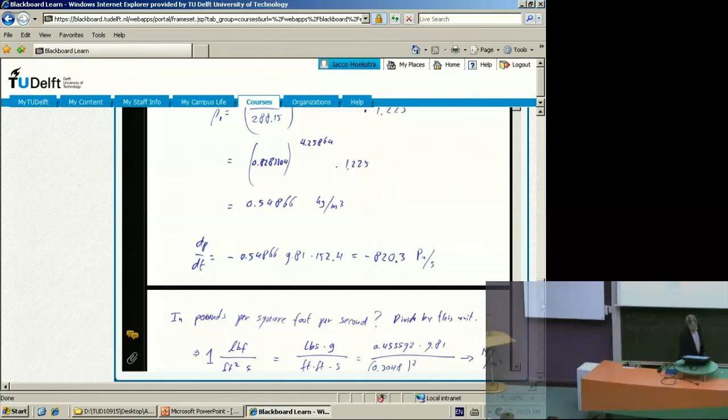But now he comes up with this strange unit. He wants the answer in pounds per, what is it, pounds per feet squared second or something. Well, there it's not obvious immediately whether it should become larger or smaller, so the best way is then to be a bit careful with the units.

Let's first calculate what 1 pound force per feet squared second is. We just make for pound force, we fill in pound times G, feet times feet. So here we fill in the numbers, and we get that one of these strange units is 47.897. So if we now divide our answer, which was Pascal per second, by this strange unit, we should get the answer stated in the American solutions.

And you see that it's minus 17.13 instead of 17.17, and that's because in the solution on the web, all the intermediate answers are rounded off to 3 digits or something, and I tend to carry a few more digits with me along the way.

So this is rounding off. Also, the decimal point is often hard to see in those solutions, so the PDFs aren't that great a quality. So at first it looks like it's 1717 or something, but just divide the answer by this, and we get this in a strange unit.

And that's as simple as it is. Any more questions, you can always email me, and I will try to put better solutions on the blackboard.